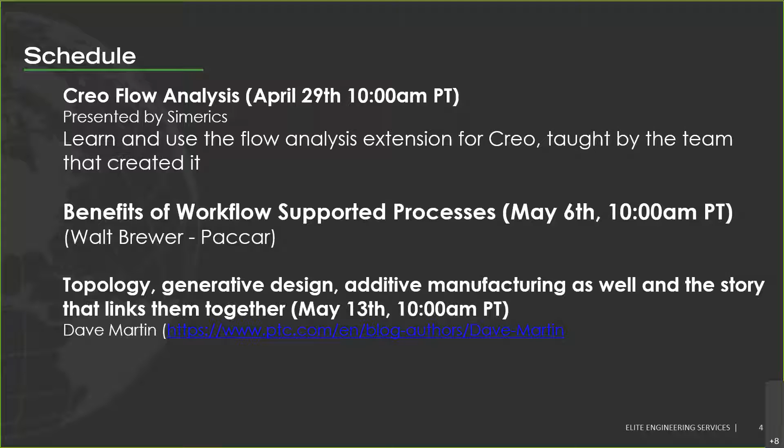Thank you, Stuart, and welcome everyone in attendance today. We really appreciate you taking an hour of your time to learn about Creo Flow Analysis in detail. My name is Rich Moore, and I'm joined today by Alex Chang, who is our lead application engineer for Creo Flow Analysis. And I'm going to very quickly take you through the digital fluids that you can create in Creo Flow Analysis for Creo designers and engineers and analysts that you might have within your company. Explain to you what it's based on, how it connects everybody from designer to analyst, what are the advantages, a couple new items in Creo Flow Analysis, and what are the Creo Flow Analysis best practices, and we'll jump right into the workshop.

We are based in the Pacific Northwest, headquartered in Bellevue, Washington. And for the last 14 years, we have developed the leading analyst CFD platform called Simerics MP and MP Plus. And on that platform, we built PumpLinx, which is used by companies to simulate pumps, valves, and compressors, and Orca 3D Marine CFD. We've taken the entire platform and embedded that into Creo Parametric in the form of Creo Flow Analysis, so that you get usable, affordable, and reliable CFD as a parametric CAD user.

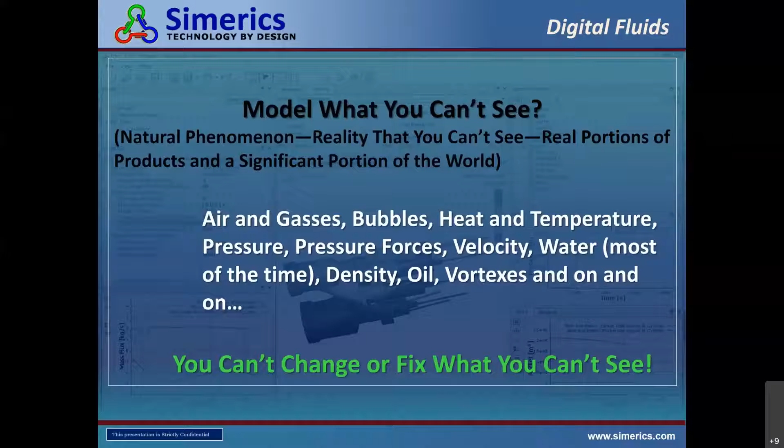Creo Engineers meet Analyst CFD functionality. No one else has embedded the high end of CFD into CAD in a usable, affordable, and reliable way, connected to the analyst team.

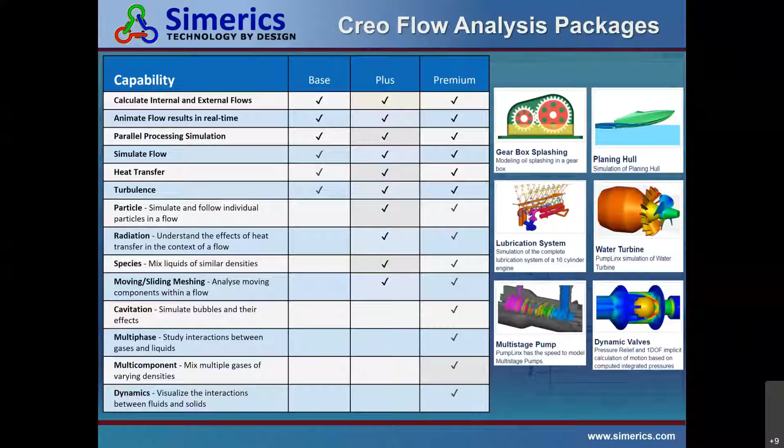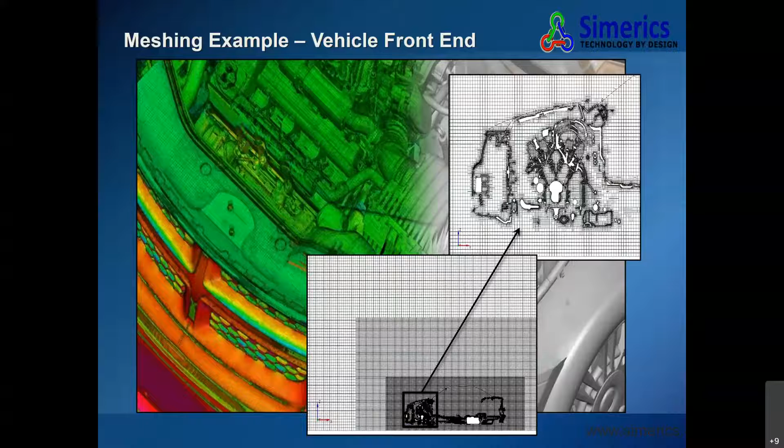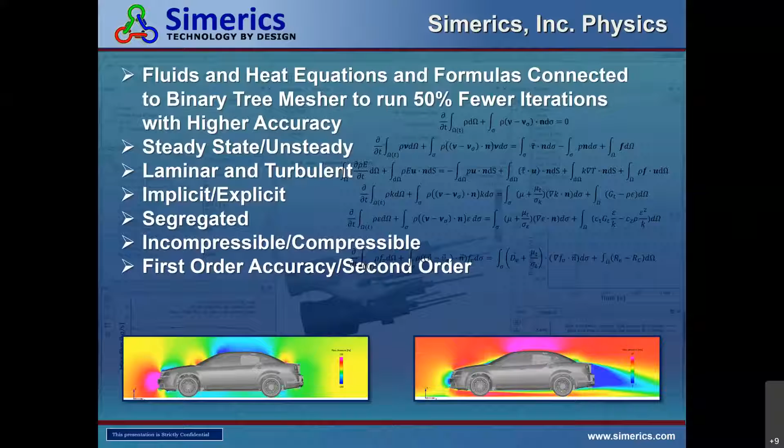We have some real advantages you'll see in the workshop today. First and foremost is our automatic and efficient mesher. This is a very complicated underhood automotive conjugate heat transfer problem, and we automatically mesh this, starting with a coarse mesh, going finer and finest automatically around every sharp edge and complex piece of geometry. We body fit that, split the mesh in half, and connect those to the formulas and equations so that we iterate 50% fewer times than any other solver in the marketplace. So think of an automatic and efficient mesher even when things move and slide, and 50% fewer iterations. We also fit into the PTC digital thread, where we paint and animate in real time.

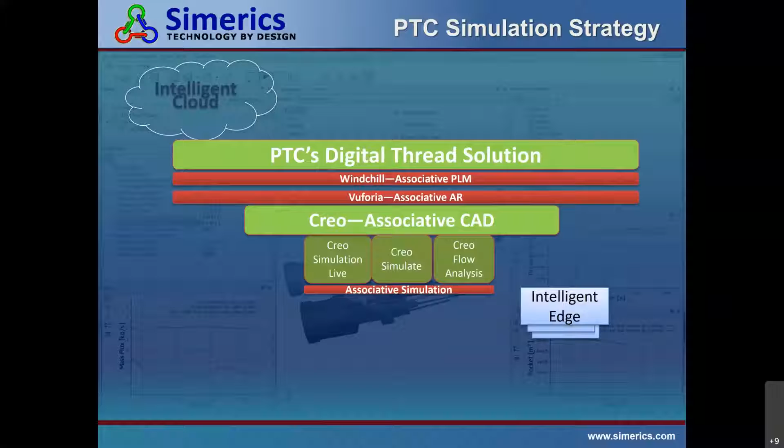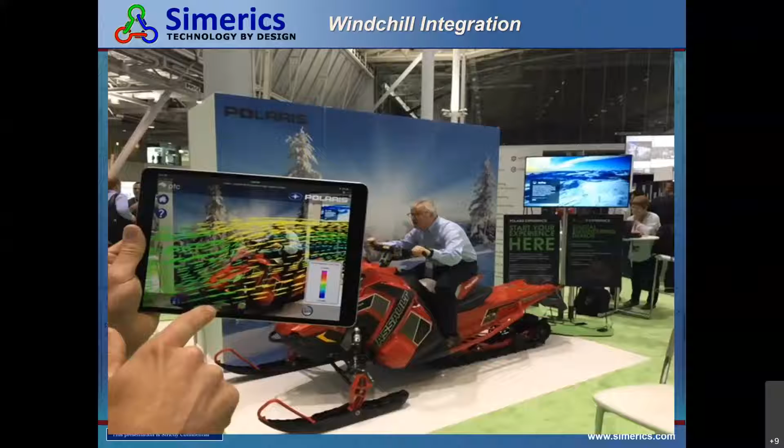This is the whole digital thread of PTC—Creo Parametric, Creo Flow Analysis, Vuforia Studio, and Windchill—to select, for example, do I need a large windshield or medium or small based on my body type, as you can see here in the picture. One of the advantages we have is we use the same development kit as the PTC developers who develop Creo Parametric and Creo Simulate.

We are the strategic partner for CFD for PTC. We're integrated in Creo 4, 5, 6, and now 7. In a year we'll be in 8, and then 9 and 10, and so on. What you get is Analyst CFD functionality embedded into Creo Parametric and body fitted so that you get great results.

PTC and their resellers have had tremendous success selling Creo Flow Analysis to hundreds of companies. In just 2 years, they've sold over 400 companies now, over 1,200 users. The adoption has been phenomenal, quite frankly, and it's been a great partnership. We do the development for the most part, and get a lot of help from PTC, especially on the testing and QA. They do a great job, but we also do the support and the training.

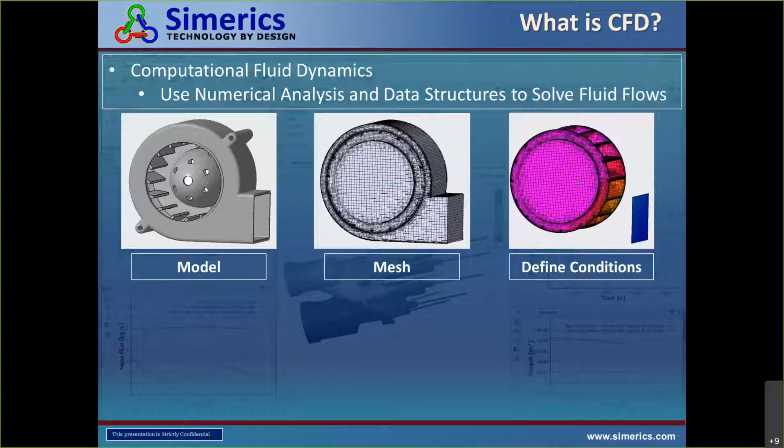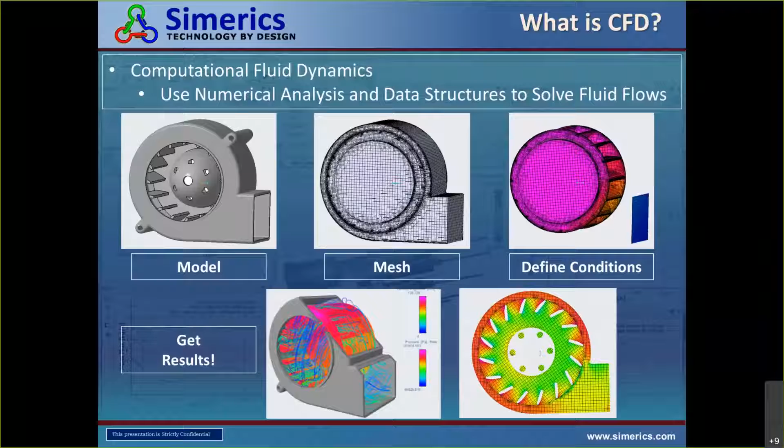From there, you can get results. The advantage of CFD is it gives you very high fidelity results that are very difficult to perform with hand calculations. With numerical models, you get a new level of depth and understanding of the fluid flows in your designs.

So, Creo Flow Analysis - again, this is analyst level CFD. You have all the same controls and physics that are available to analyst divisions all over the world.

For us, the technologies that make it usable for a wide user base include the fully automatic mesher, tools we've developed thanks to our integration with CAD packages - like automatic fluid domain extraction, which is a huge time saver. We have a built-in fluids database you can get up and running immediately, and we take your material assignments from the assembly and import them automatically. There's a lot of quality of life features in the software that make it very practical and usable in a design workflow.

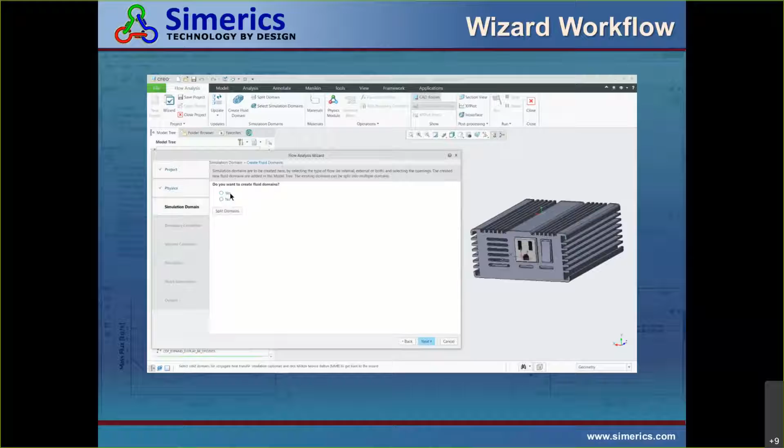Now we'll step through the features available in Creo Flow Analysis. The first one, I'd say one of the biggest for usability, is the wizard workflow. For first-time users, or just if you only use the software every other week or so, you don't have time to internalize the steps. What we do is break down all the steps and properties needed to set up a CFD analysis and lay them out in a nice, straightforward UI - basically turning it into form filling. It's great for that guided workflow.

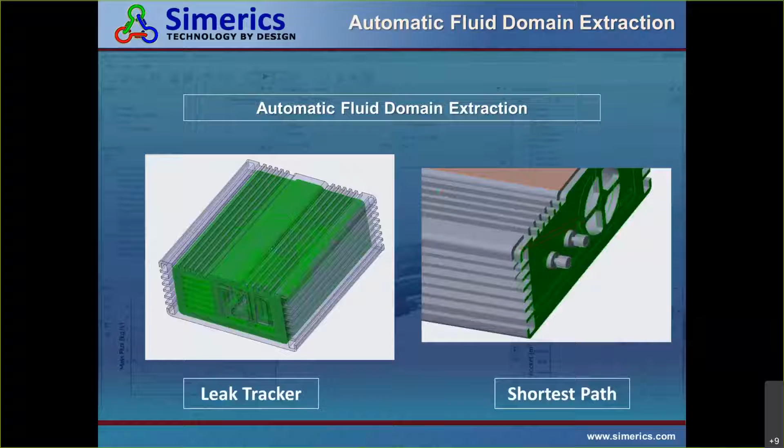As I mentioned, we have automatic fluid domain extraction. This one's really nice because the traditional workflow is you have to click all the surfaces, merge them together, and then try to solidify them. In our case, we've boiled it down to just a few clicks, and we'll see that in the demo in just a moment.

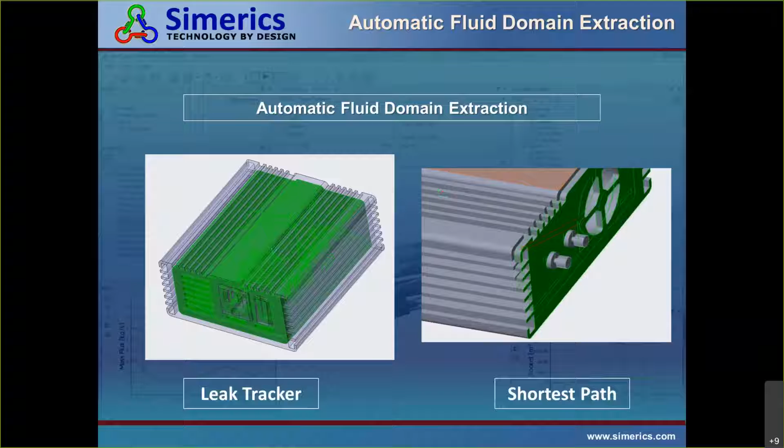The fluids materials database has a list of the most commonly used fluids available to you from the get-go. You can also add your own custom fluids if there are any you use often that aren't listed. We can do constant density fluids, compressible gases - ideal and isentropic gas law - compressible liquids, pressure-dependent fluids, pressure and temperature-dependent fluids, equations of state, non-Newtonian fluids. We cover the entire spectrum as far as fluids and what you can simulate.

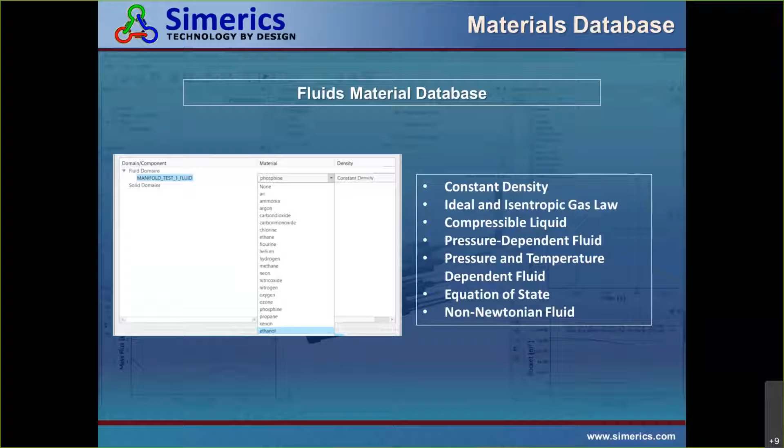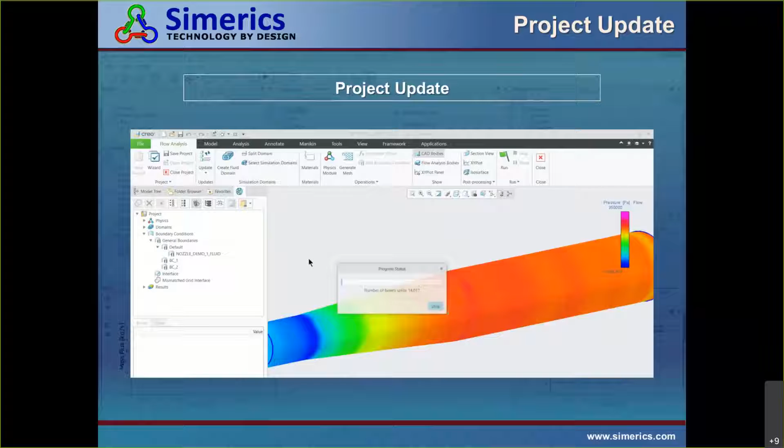This marriage of CAD and CFD brings a host of advantages. One of the most exciting for me is project update. At any time with flow analysis, you can always go back to the model. You can open up parts and modify them, reconstrain components in the assembly, then click back to the flow analysis ribbon, hit update project, and we'll update according to those geometry changes. In this case, we take our smoothbore nozzle and reduce it from a 9/16 bore to a 1/2 inch bore, and with just 2 clicks we can see the results on the updated geometry.

As far as outputs go, we can do surface contours for pressure, temperature, velocity, density, gas mass fraction, whatever you might be looking for in your fluid analysis. We can output integrated values like mass flows, pressure drops, and flow rates - great for manifold balancing and other applications. We can also create animations for your presentations or for your own reference and understanding of what's going on inside the model.

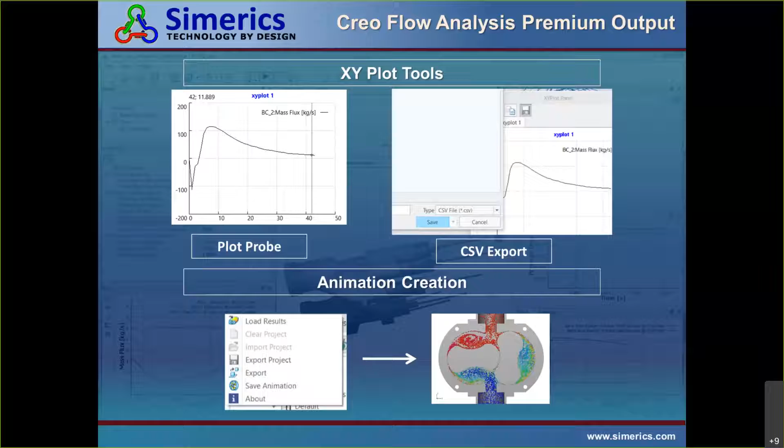We are also integrated with Creo Simulate. What we can do is take the pressure distribution or temperature distribution solved in Creo Flow Analysis, which fully accounts for dynamic fluid behavior like wall friction, velocity, and density changes, giving you the full picture of the fluid contribution to your design. We can then take that pressure or temperature data and export it as a load in Creo Simulate, as an external coefficients field.

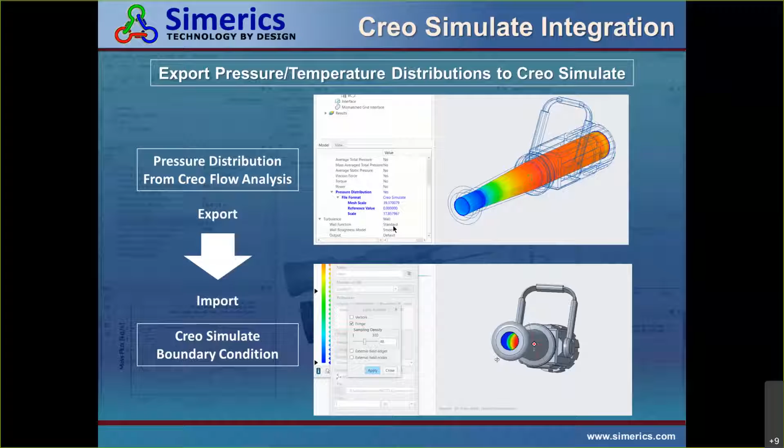This fills in that missing piece in some of your FEA analysis, allowing you to get the correct deformation, either thermal or pressure based, due to the fluid running through your models.

Now I want to take you through each physics module available in Creo Flow Analysis, and also offer some examples to see if they fit your use cases.

We're starting with the base package. With the base package, you get flow - covering internal flows, external flows, or both. You can see some examples here: we have the boat porpoising through the water, an example of a both analysis. And we have some examples of external flow analyses here.

Here's one we did - a hockey helmet. They wanted to look at the thermal comfort of their design as well as the aerodynamics. And an example of an internal flow here is a turbocharger.

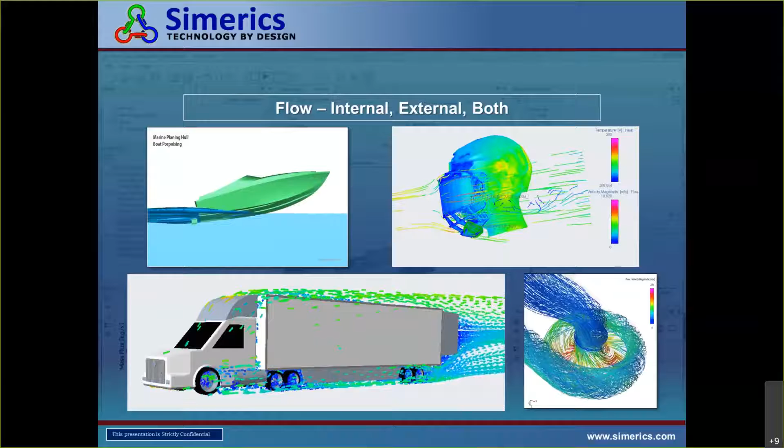In addition to flow, we also include heat - specifically conduction and convection. So fluid to solid and solid to solid heat transfer is included.

The most common use cases I've seen for the base package are electronics cooling - modeling different electronic components and their temperature distributions and thermal performances. We've also seen a lot of manifold balancing, turbo or exhaust pipe analyses, and heat exchangers. One of the more advanced cases still coverable by the base package is this underhood flow analysis - you can see there are thousands of components, all fully modeled in the underhood of a car.

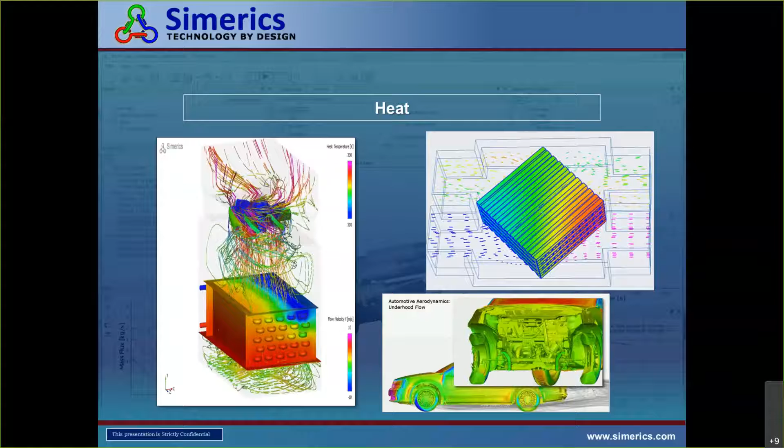Now we're on to the Plus package, which adds a lot of great bells and whistles. We do have particle analysis - a great way to see how well particles will distribute throughout your design. It's also a post-processing tool - you can inject particles of varying density and see exactly where they would go in the model, helping you better understand the flow.

We've also recently added particle erosion modeling. If you have sand in your flows, be it in fans or oil, we can actually model the expected impact of erosion - the thickness and damage on your wall boundaries - giving you a much better idea of the life cycle of your designs. Particles' biggest application has been in oil and gas, especially working with crude oil - we've done several cases in that area.

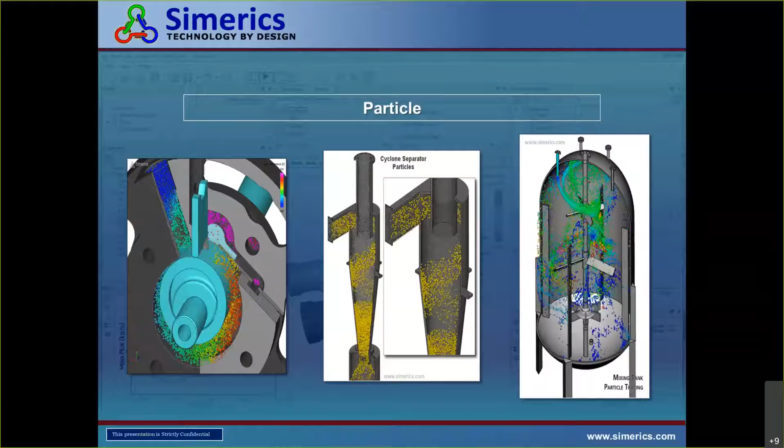The Plus package also brings radiation, the third component of heat transfer. For radiation, you can add solar loads to your models, or see how your design will perform out in the open with direct sunlight on it. You can control the direction and set it as a function of time. For our radiation module, we use surface to surface calculations via ray tracing. For each cell in the model, we emit the default value of 256 rays, and from there we can determine what surfaces see what.

We can calculate the reflection and diffraction of where the heat is going. You can see some great examples here on the right. This little office building has a solar load, just a distributed load. You can see how it's able to trace out the reflections on the awning, and how it's able to pass through the glass and trace these arbitrary shapes. Here's an example, a keyhole and a parallelogram, and you can see how they're traced out accurately on the ground. That's thanks to our use of a view factor ray tracing calculation. Radiation gives very accurate and detailed results as far as radiation goes.

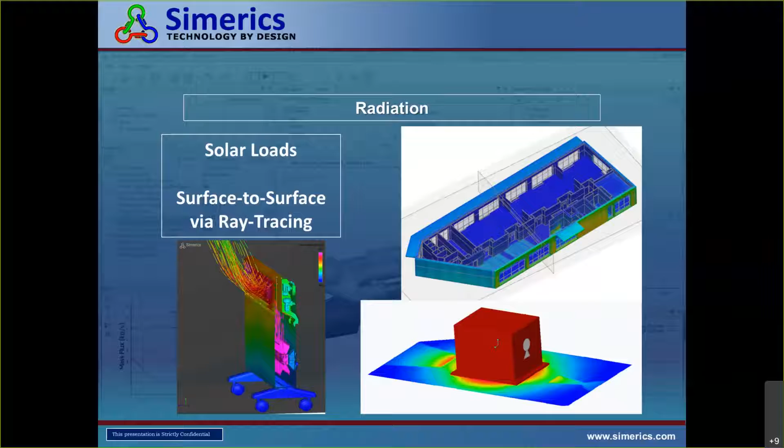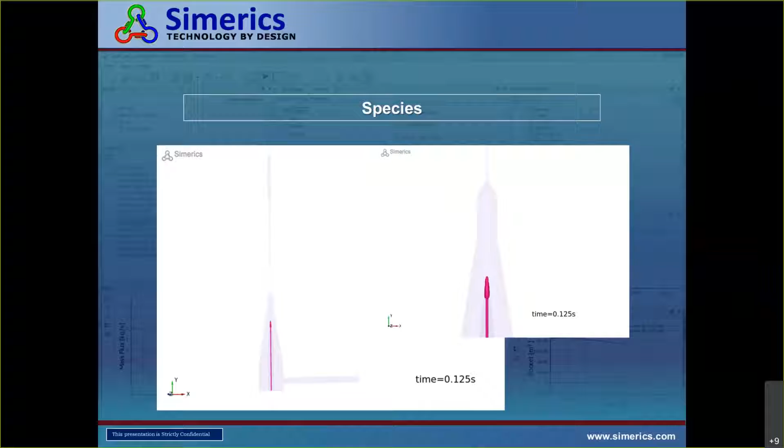Species is one of our more niche applications, but there's still use for it. What this allows you to do is basically solve another transport equation, so track an injection of another fluid of a very similar density. In this case, we're looking at a microfluidics example, basically water injected into water, but they still stay as two separate entities just because of how fine detailed the flow paths are. In this case, it's on the order of micrometers, so it's able to maintain that without too much diffusion. Also, chemical species transport is a common use case for species.

And then kind of the star of the show, I'd say, for our plus package is the moving and sliding mesh. Thanks to our special meshing technology, because the cells are able to cut themselves into any shape needed, our mesh can freely rotate or translate depending on how you define it. So of course we'll see a lot of fan analyses here, pump analyses. For moving and sliding mesh, we win hands down in every category, on speed, on robustness, on accuracy. This was kind of the company's specialty coming into the market, and it has remained one of the company's strongest points.

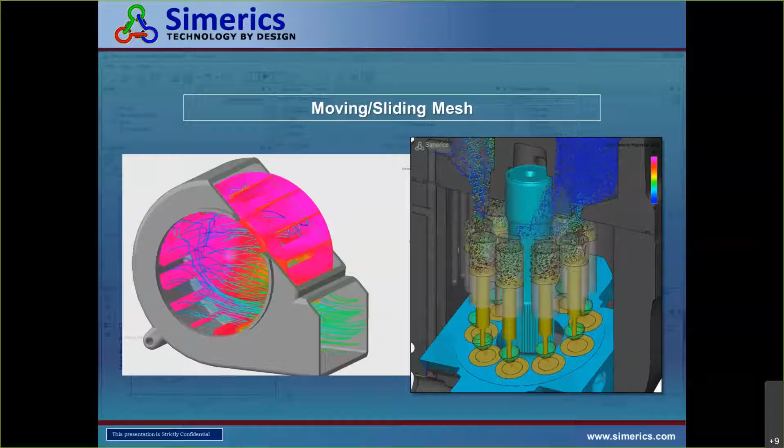I know a lot of customers, especially with pump design, they just run their model on the test bench for a couple hours until it breaks, take it apart, and then look around for cavitation pitting. But they don't understand what exactly is happening, what's really causing it, and where it's actually forming. So using CFD, you can actually really understand what's going on in your designs and make design changes.

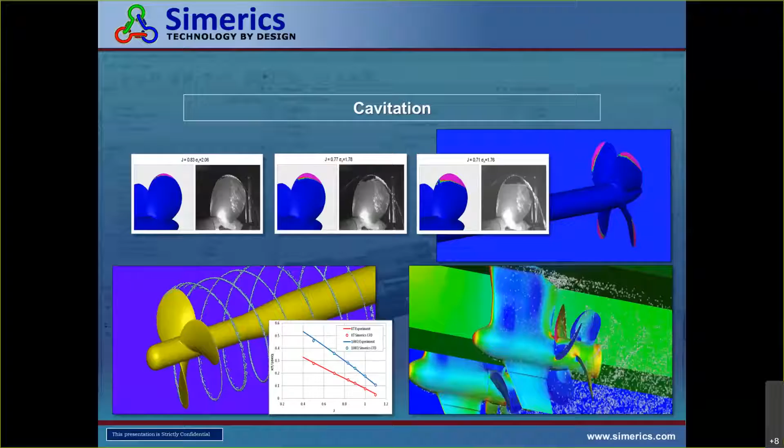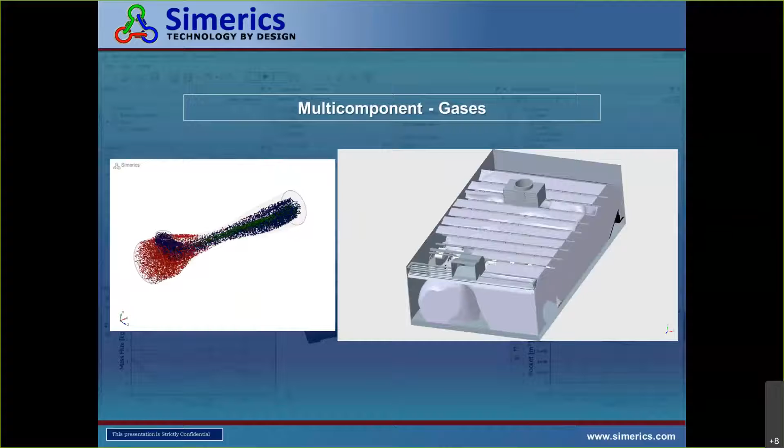And then we have multi-component. So if you're interested in modeling, say for example, air as its constituent components, instead of as a single fluid, you want to see carbon, nitrogen, oxygen, where they disperse to, kind of how the distributions work, then that's where multi-component will come into play.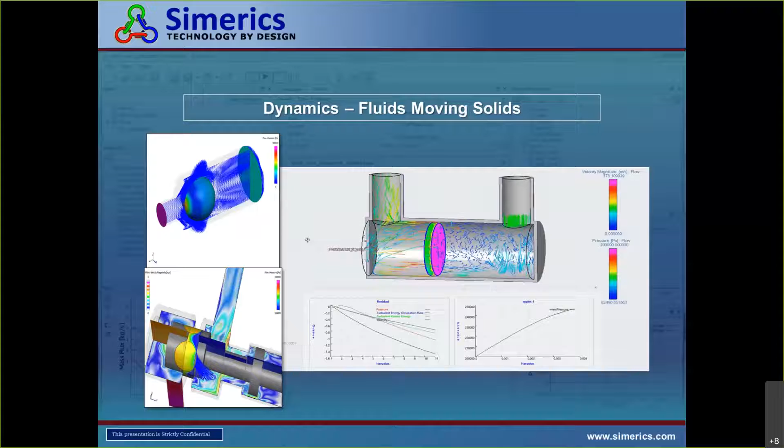All right, so let me go ahead and switch over to Creo here, and we can jump into a demo and kind of see everything I was just talking about in action. What I would like to look at, since we're a bit tight on time, is this power inverter here, which gives a great example of electronics cooling, or what we call conjugate heat transfer. Just really look at the advantages of having CFD in your Creo workflow.

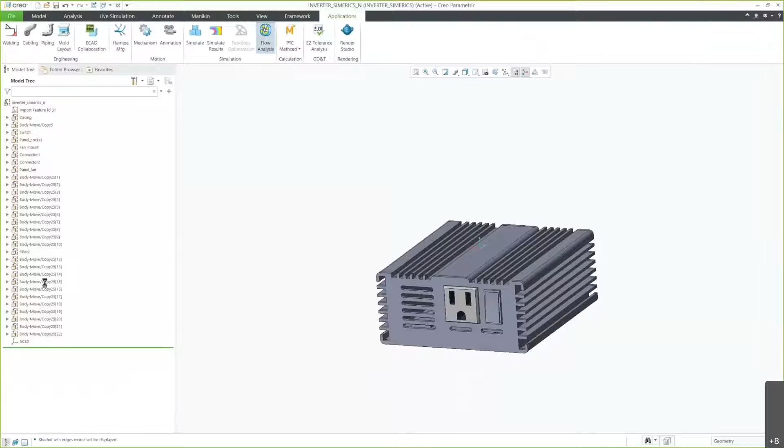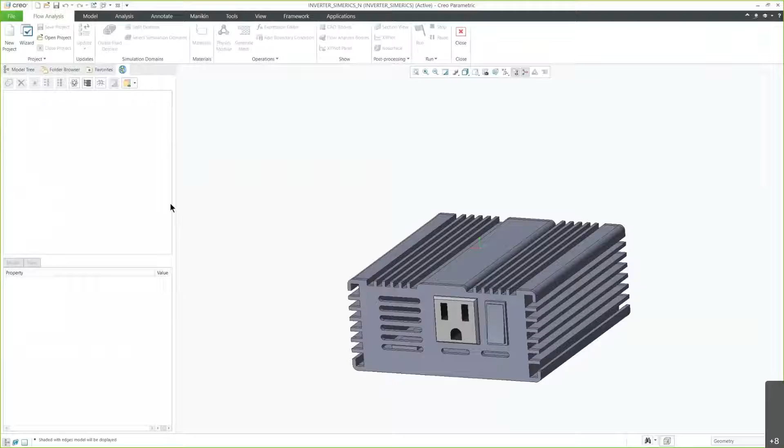So for this case, we are just using the base package, so flow and heat. You can see right off the bat, instead of having to open a separate tool or anything, all you need to do is click on Applications, Flow Analysis, and all we do is switch out the ribbon. Actually, one moment, let me fix my screen here real quick.

I hope that looks a little better. I know there's a little clipping on the other monitor.

No need to relearn how to pan or rotate, right? All the base controls are the same, same environment, same environmental variables and configurations. So it's a nice seamless jump into the CFD.

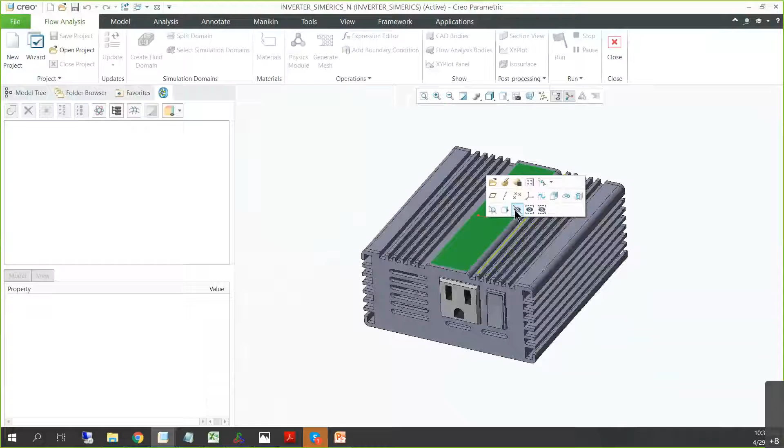What I want to demonstrate here is the wizard workflow. We take our little power inverter, with all its components modeled, ready for its first validation. We'll run it through the wizard and then get results.

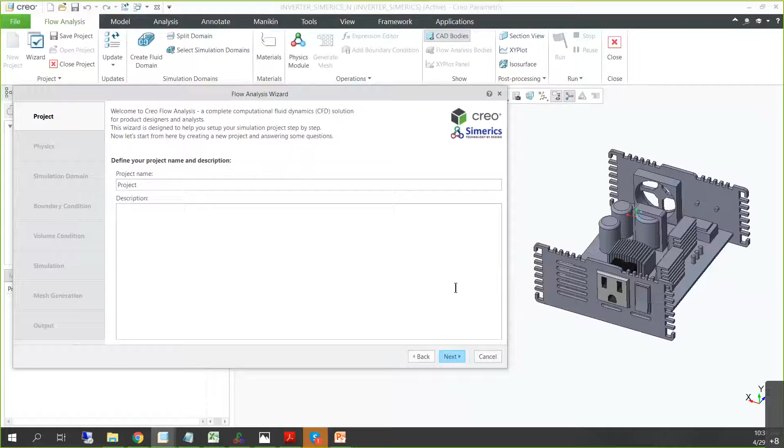Okay, so we'll see how the wizard works in action. You can name your project and give it a brief description for your reference, or to refer colleagues if you decide to pass the project over to them. This is integrated with Windchill, which we forgot to mention, so you can take your analyses with your models into Windchill and have those stored there.

We're just going to go through the steps as the wizard asks. The first step is to choose our physics, so we're going to grab flow, turbulence, heat, and streamline. You're currently looking at the full list of physics modules in Creo Flow, but right now I'm using all of the physics available in the base package.

Again, it'll ask us questions. In this case, gravity force isn't really going to do anything, so we'll leave it as no.

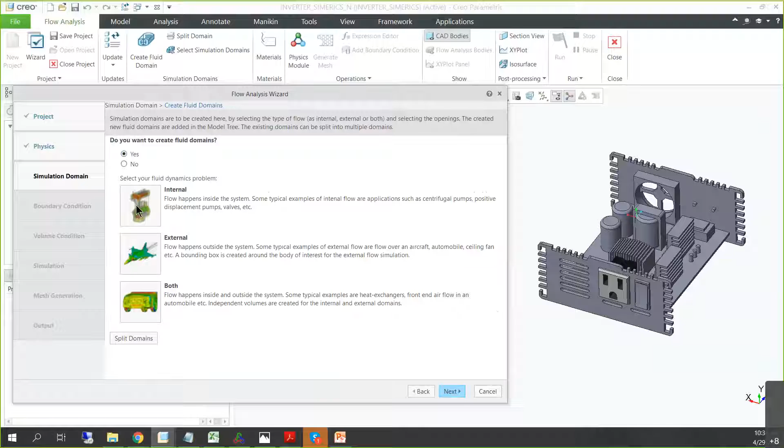Do we want to create fluid domains? Yes, and this is where we can also select the type of analysis we want to run: internal, external, or both. In this case, we just want to run an internal analysis, so go ahead and click on there. And it'll begin initializing the fluid domain extraction tool.

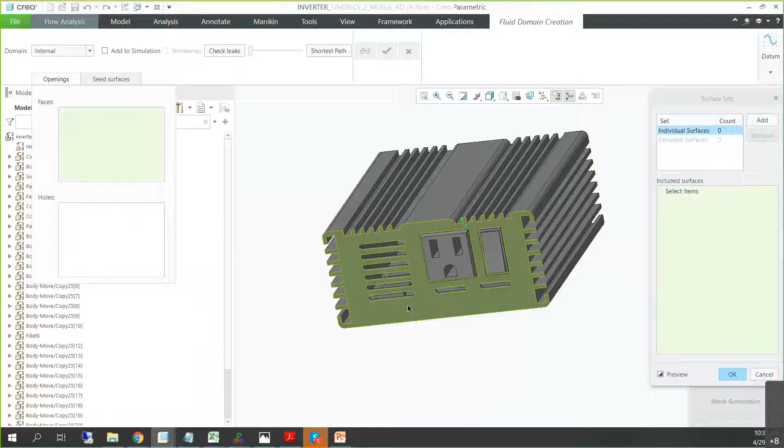So we have on the screen our full assembly. From here, all we need to do is click openings, faces, and then select any surfaces in our model that contain openings—so inlets, outlets, vents, or the like.

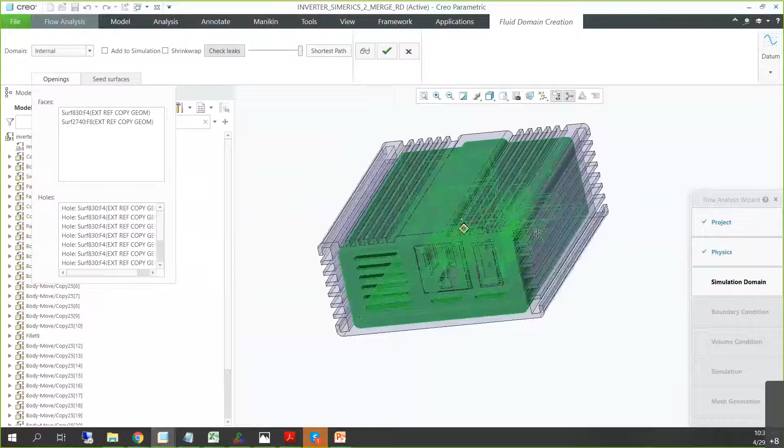In this case, we just have the inlet and the outlet at the fan area. We can take a quick look at the preview of the fluid domain that's detected. We'll click OK, and you'll see the fluid domain appear here in the model tree and in the workspace. If we open it up, you can see that it is its own part in the assembly.

It is fully associative with your model. Take a look here, and it does in fact contain all of the internal detail there. So what traditionally was at least a one to two hour slog through clicking surfaces has now been reduced to a few mouse clicks.

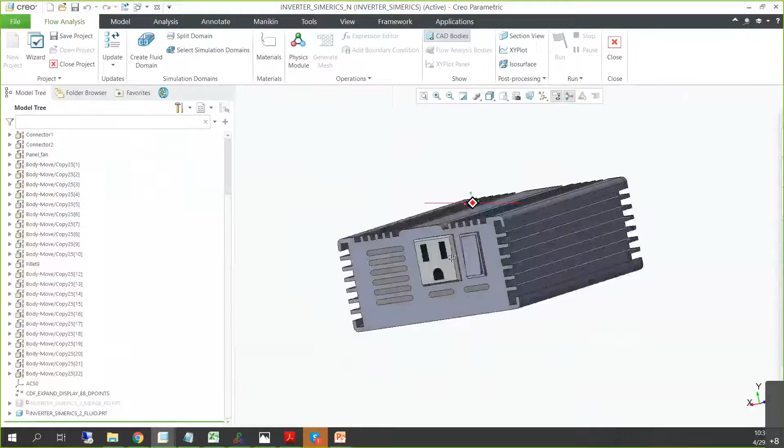All right, so back to the wizard. We're just going to click next and do what the wizard asks. In this case, we're now going to add our domains.

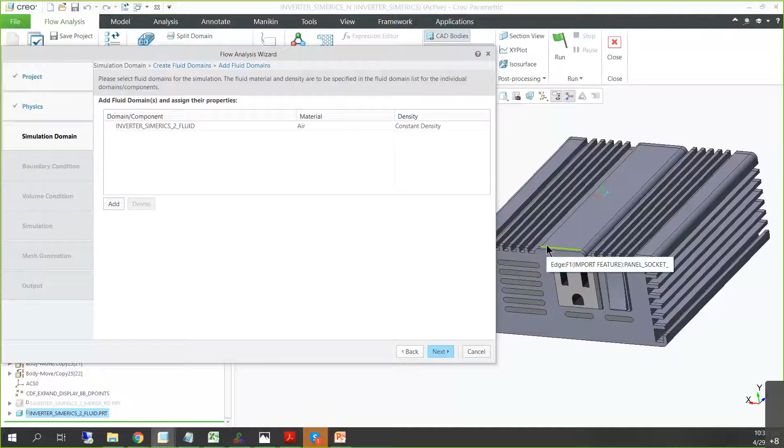One thing we elected to do with Creo Flow Analysis, instead of just assuming that everything in the assembly is what you want to simulate, is allow you to pick and choose exactly what parts you want to analyze. So there's no need to go through and suppress parts or create simplified reps—you can just pick and choose here in the software itself, maintaining the consistency of your models, especially if you have them checked into Windchill.

By default we have air, which is what we'll be using. You can see a list of the fluids we have, and we can also control the density, although in this case constant density will more than do the trick. If you want to add your own custom fluids, you can just go to materials in the ribbon, custom materials, and input it there.

All right, now we'll add our solid domains. This is where the no-need-to-suppress thing is very handy—I'll be using all of the parts in the assembly, but again, you can always pick and choose.

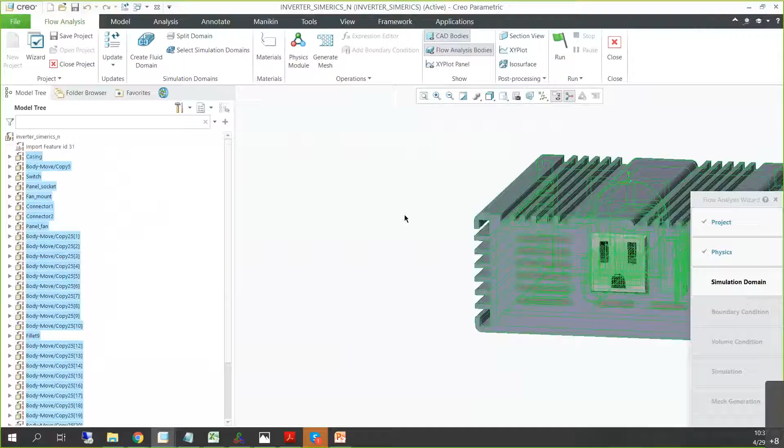Our assembly here already had materials defined. So if you were using a non-integrated package, you'd have to export a spreadsheet of material assignments and reapply them. In this case, we can pull directly from Creo—from the local database on your machine, or from Windchill databases, importing them automatically. You can also change them on the fly if that's of interest to you.

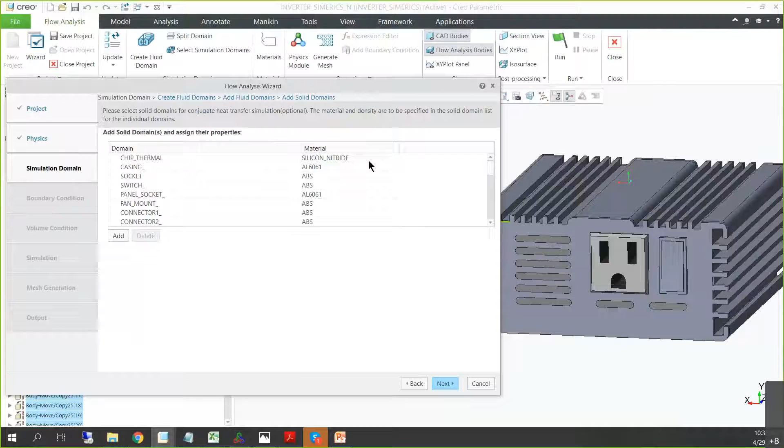All right, now we're on some boundary conditions. This is kind of the beginning and the end that you input, based on the working conditions, either to match your test bench setup or to look at the expected working conditions that your design will exist in.

We'll start with the inlet here. The inlet is just kind of a vent cover. So for this, we can just set it as a pressure inlet, so that it's 1 atmosphere of pressure, just an opening out to atmosphere.

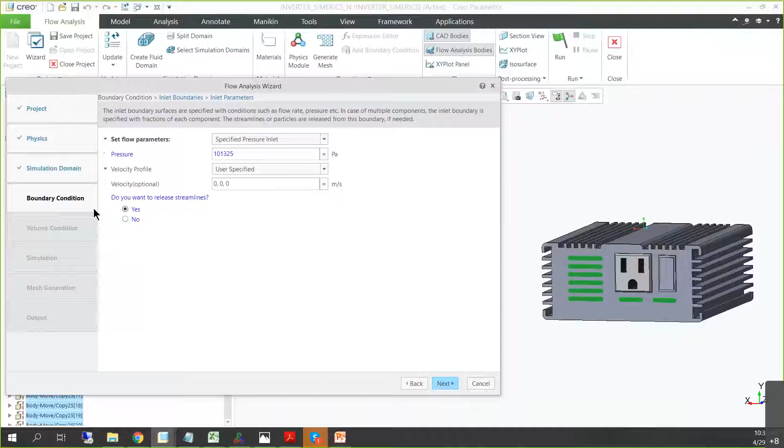Here we can also release our streamlines. If you notice those animated lines moving through a lot of the GIFs we've shown you today, that's what those are. So we'll just toggle them on, and they'll trace from the inlet all the way to the outlet, so we can get a good understanding of how the flow looks animated in 3D.

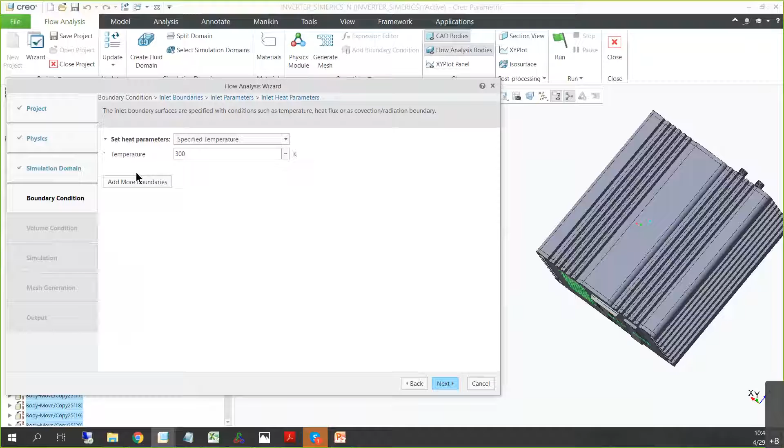The nice thing about the wizard is there is a lot of automation under the hood. This is a full analyst CFD package, so there are all kinds of controls and parameters available to you. But for the most part, you just want to get your analysis set up, done, look at your results, and then start making design changes or comparisons. So we've automated a lot of those to be the optimal setup for most use cases. Another thing is, because we chose heat, we also get our heat parameters that pop up. These would not show up if we didn't have heat, and we don't want to add in extra steps. Again, we're just here to streamline your workflow from design to simulation back to design.

All right, for our outlet, we just want to study a static flow rate. If we just set our fan speed to a certain speed, how the performance will look, we set that as a volumetric flow rate.

And we will let it solve as an outlet. So we tell it the incoming temperature is room temperature, and then just based on the conditions as it flows through the power inverter, solve the temperature itself at the outlet.

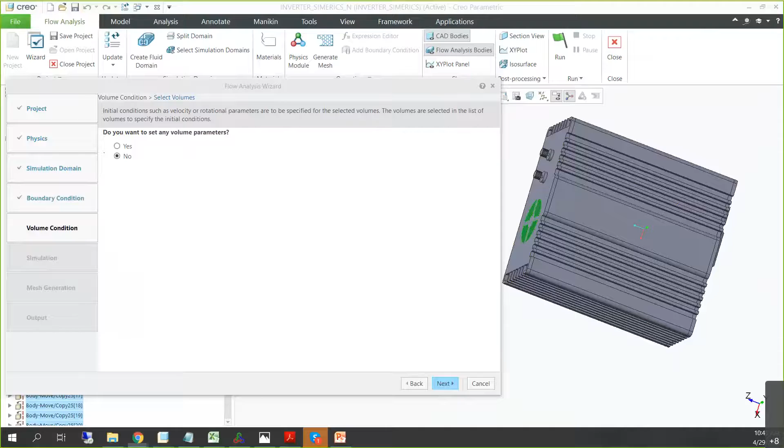That's it for boundary conditions. Now we're on to volume parameters, and this is where we can apply heat sources in this case.

For example, we have our chip, our thermal chip here. We want to set that as a heat source of 5 watts. And we can go back in, set additional heat sources.

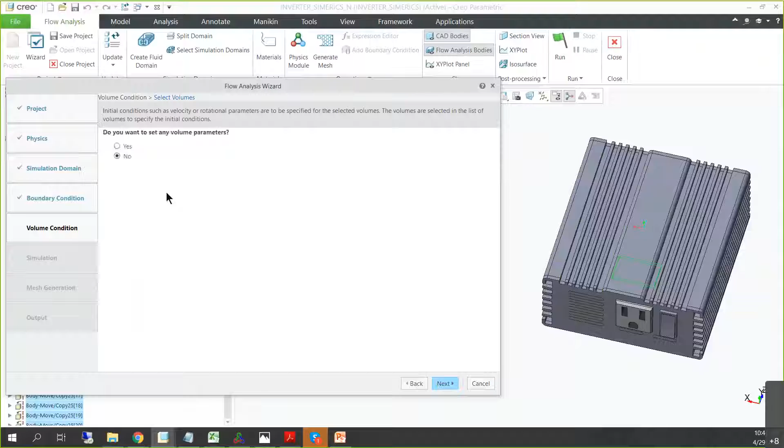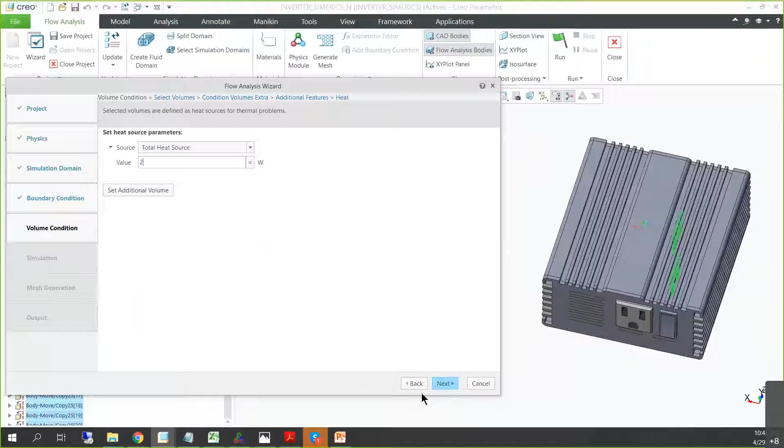In this case, our transistors are definitely generating heat. I'll just grab them. You can set multiple volumes at the same time. Again, as a heat source, total heat source, say 2 watts here. So now we have a total of 5 heat sources in the model. You can add as many as you want, really.

Our solid thermal solver is built right into the fluid solver. They're integrated from day one as a singular code, so it's very fast and efficient for these conjugate heat transfer analyses.

We support steady and transient problems. Steady state solves to a steady state, kind of the equilibrium point you'd expect, how your model would operate 90% of the time. If you're interested in heating and cooling times, we also do transient analyses, and that is a one-click switch, no need to create a new project for that. So with this, we can run the analysis in terms of real physical time, so you can see how long it takes your components to heat up or cool down.

All right, and then now we're on to mesh generation. Again, fully automatic mesher. Really, the only inputs you may ever need are this maximum, minimum, and cell size on surfaces. You can reduce these values if you want higher fidelity results.

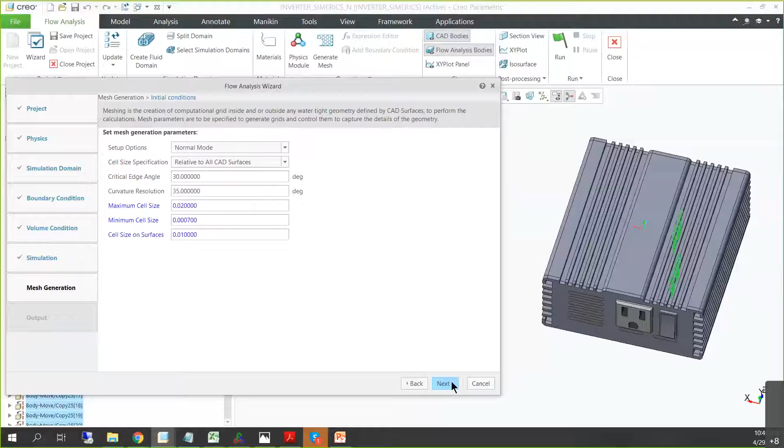I found in my year and some change working with this software that the default parameters work very well and fit experimental data extremely well, especially integrated values like pressure drop or flow rates. We're always within 1 to 5% on the first pass, and again, that is with the default mesh parameters.

And so as you can see, in addition to being very easy to use, it's also very fast and robust. You benchmark this against any other software, we win hands down on meshing.

So now we're on the last step of the wizard, which is really just kind of the outputs we want. We want some hard numbers on our design to gauge its performance.

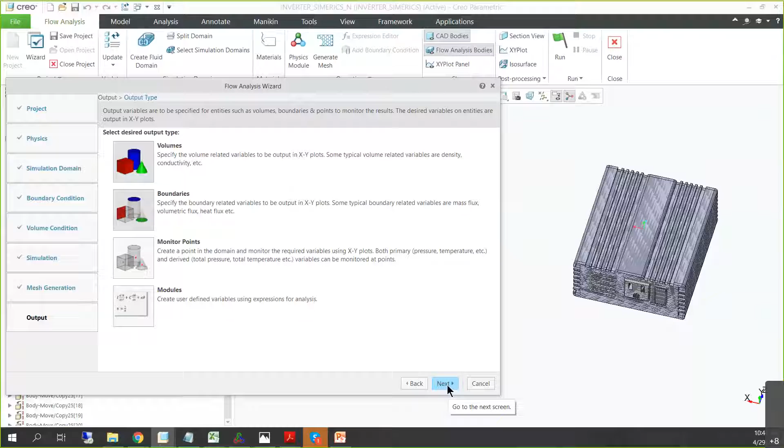So in this case, I'll grab, say, our heat sources. Maybe we want to take a look at the max temperature that each of them are looking at. We just switch them on, and then we can throw them on separate XY plots or the same one for direct comparison. It's really up to you, you have a lot of control here in how you want your data presented. In this case, I'll put the thermal chip on its own plot, and then the transistors on their own, on another plot.

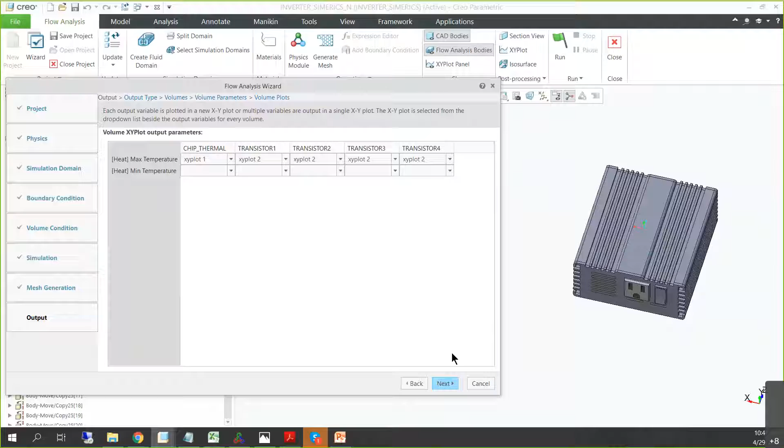And from there, we're ready to go. So I'll click next.

And then one more, so at the outlet, maybe we can put out the temperature to see how much more the fluid itself has heated up after running through the power inverter. We can also output the pressure, maybe look at the pressure drop across the model, and add these to their own XY plots. Nice and easy.

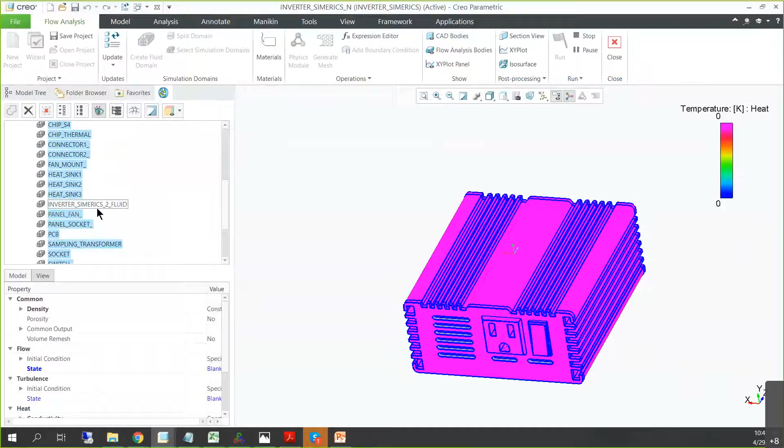Finish, and then run. So now you'll see another one of our really cool advantages that we haven't mentioned up until now: we can render our results in real time. So instead of having to wait however long for your simulation to finish, you can immediately see the results from the get-go.

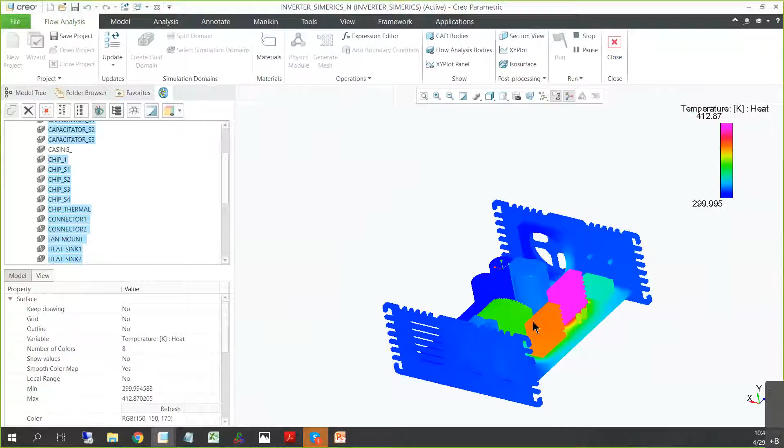So what I'm going to do is color all of these internal surfaces with temperature. Go ahead and hit refresh on the range. Already, we can see our results just as it solves. It'll constantly update if needed, but you'll find that in the first tens of iterations, it already has a good idea of where it's going.

Maybe I can run it again just so we can see how that looks. It starts with our initial conditions, and then it can immediately start solving and rendering those results. Again, Creo Flow Analysis is a full CFD suite, all integrated into one workspace.

And then now I'd like to take you through some of the post-processing. Of course, we have our contours, which we're looking at right now. Any one of your parts, you can color all the surfaces with a variable like pressure or temperature, whatever you might be looking at, and render those.

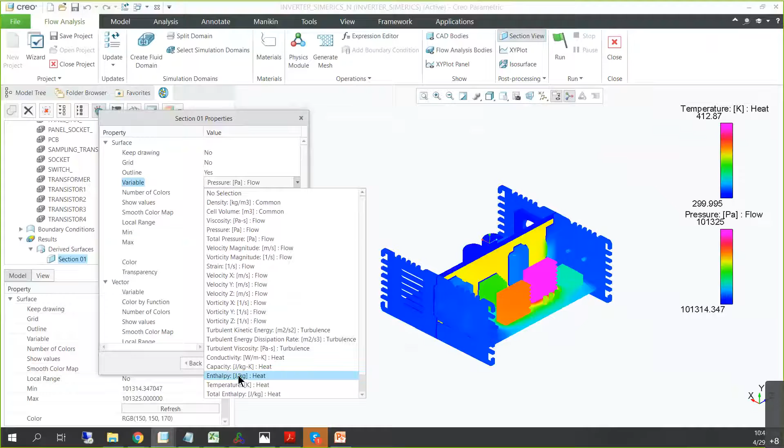And of course, we have our section view - a 2D plane, XYZ, arbitrary. Color it with pressure or temperature again, and you just kind of walk it through the model to get that high fidelity view in 2D of the fluid and solids.

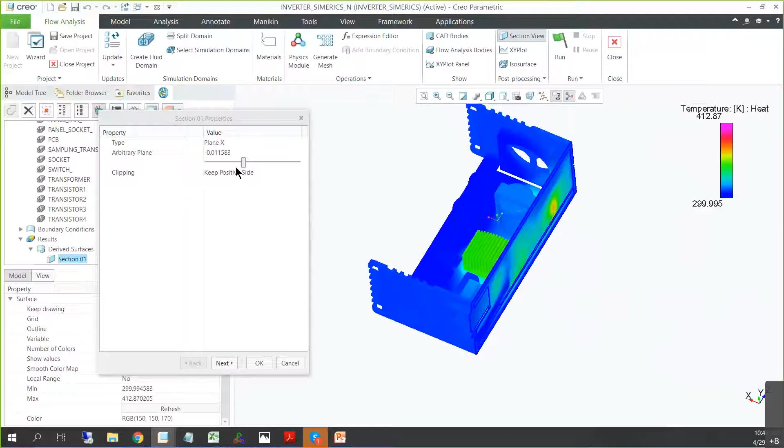We can also clip off the simulation surfaces, and I found it makes for really good results for presentations and the like. You can get very creative with how you want to present your results.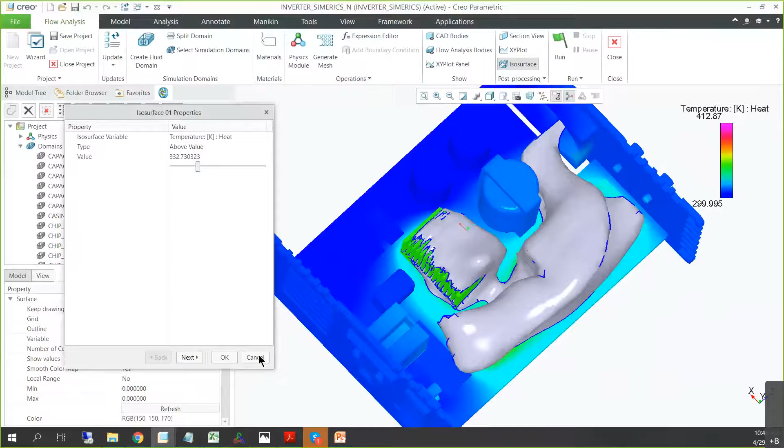And then, definitely my favorite, we have our streamlines. Go ahead and add a few more here, and take a look. So you have choices here - we can first do this kind of rope view. Maybe we can color this with velocity magnitude.

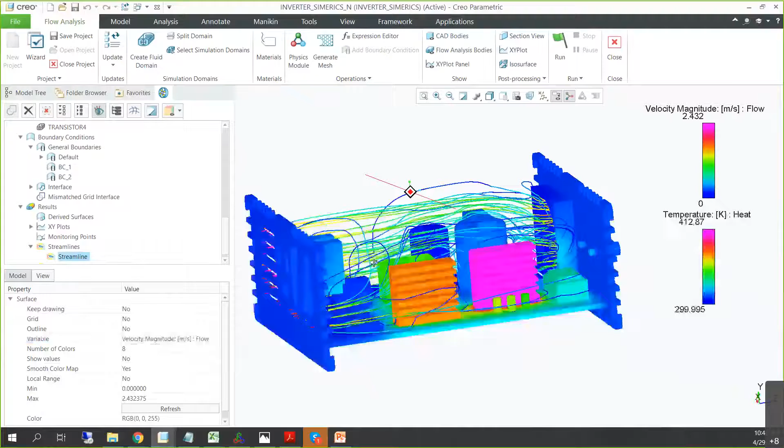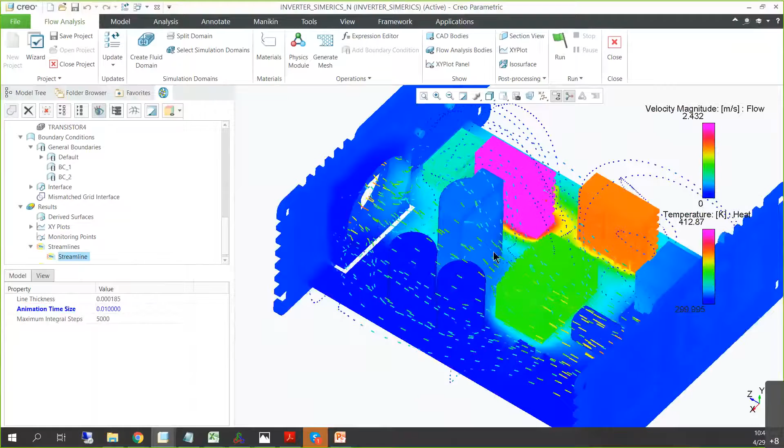You can trace the flow from the inlet to the outlet and see the values along those lines. We can also animate them, and they're animated relative to their actually solved speeds. So this is just another great way to get a better understanding of the flow in your design - you can visually see where your turbulent areas are, where you might have recirculation and the like.

And we can take a look at our XY plot panel here - these are the plots that we created in the wizard. So we have the max temperature of our thermal chip, comparative temperatures of our transistors, the pressure value at the outlet so we can calculate the pressure drop, and also the temperature. We can see that the fluid has heated up about 11 degrees, just running through the model on average.

And so with this data, you can copy it to your clipboard, or we can save you a step and export it to a CSV file. It's kind of your preference on how you like to manipulate your data.

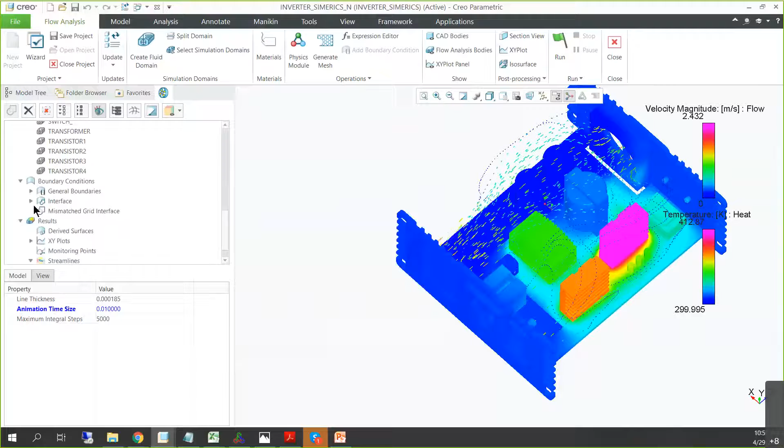So maybe one more thing, we can take a look at how the temperature export works. For any surface contacting the fluid in the model, if we go down to output, you see we have this, we do heat coefficient distributions if you want to export to another CFD package or a FEA package that you're using.

So we have the temperature distribution here. You can see one of our outputs is literally Creo Simulate. So this creates that FNF file that you can use as a temperature load in your FEA analyses for thermal stresses or deformation based on the fluid's contribution.

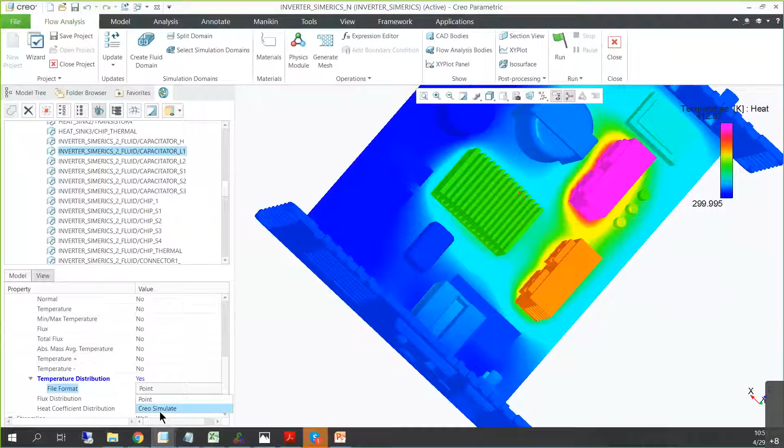And one last thing I want to show you here in the model tree. At any time we can go back to the model itself and make changes. For example, maybe what we want to do is take this big capacitor here, move it over a little more to the left. Let me show it, you can see.

Move it over, maybe open up this channel a little more because we see a lot of heat collecting there. Shift it over a few millimeters, maybe down a few millimeters. Click OK, come back to the project ribbon, hit Update Project.

What it'll do is just recreate that fluid domain. It'll remesh the model, reapply all the settings before, so the boundary conditions and volume conditions that you set. This allows you to make those back-to-back runs with different considerations for different layouts of your designs.

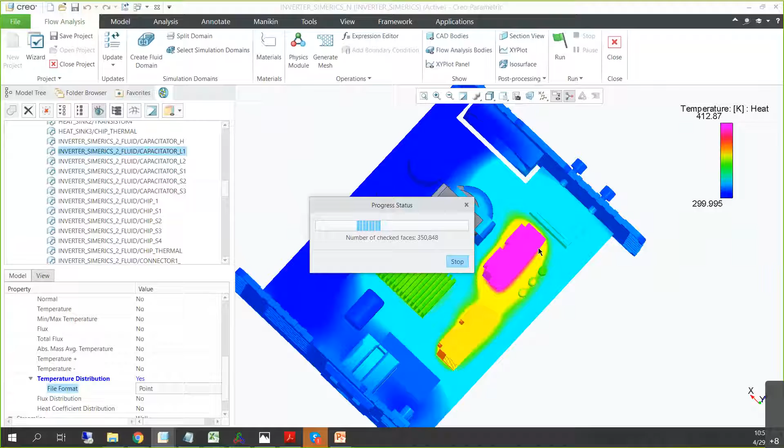And you'll see in just a moment, we also preserve all of the post-processing. So as soon as you run this updated geometry, you also have that direct comparison from before. We maintain that temperature range so you can visually see the difference immediately.

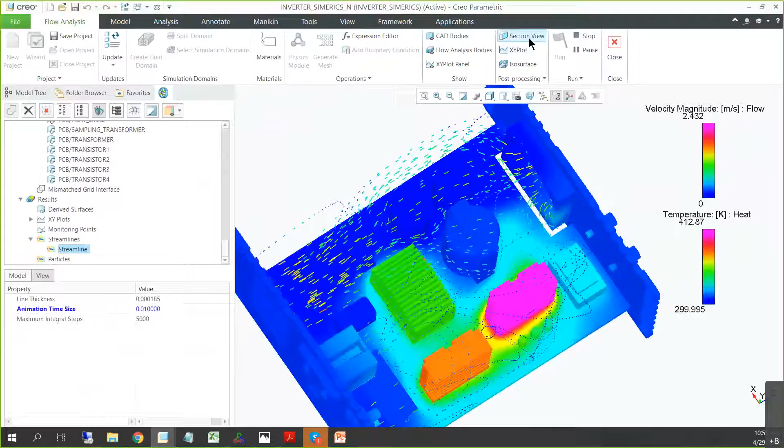Let me hide this guy. All those streamlines still there, the section views, the isosurfaces we created. Just like that. You can make design changes, great for design exploration or just kind of fine-tuning your designs.

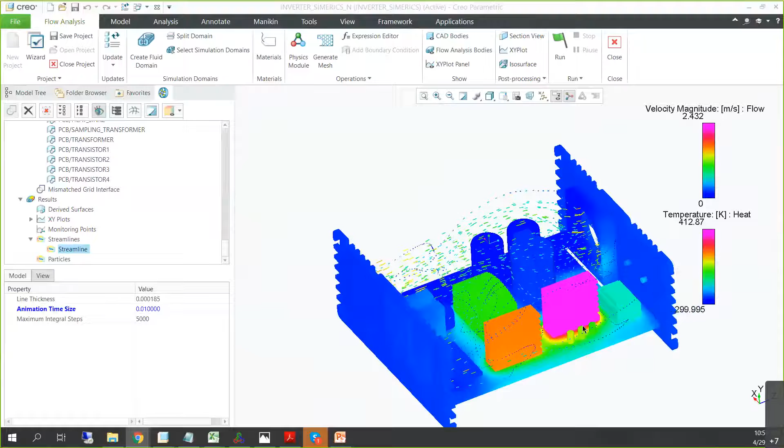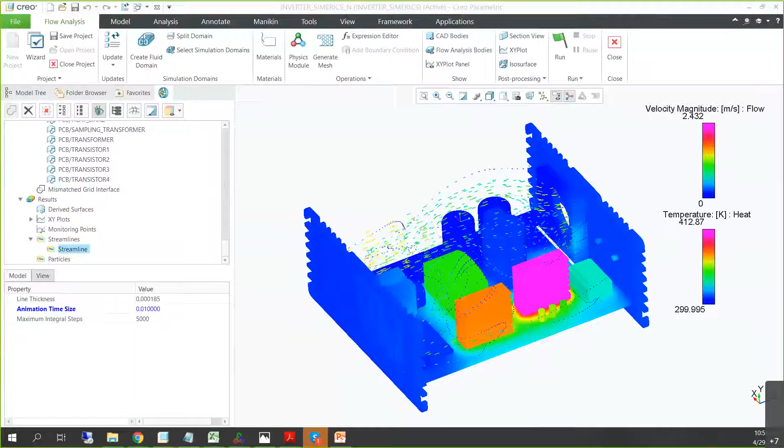You can see that it's part of the PTC digital thread integrated with Creo Parametric and Vuforia Studio and Windchill and Creo Simulate. It gives you the Analyst CFD functionality in a very usable, interactive way using the wizard, where you basically take your Creo Parametric design and put that into the wizard, turn the wizard on and answer about 15, 20 questions based on your assembly, and out comes the results. So it's really high-powered CFD in a very usable and affordable way.